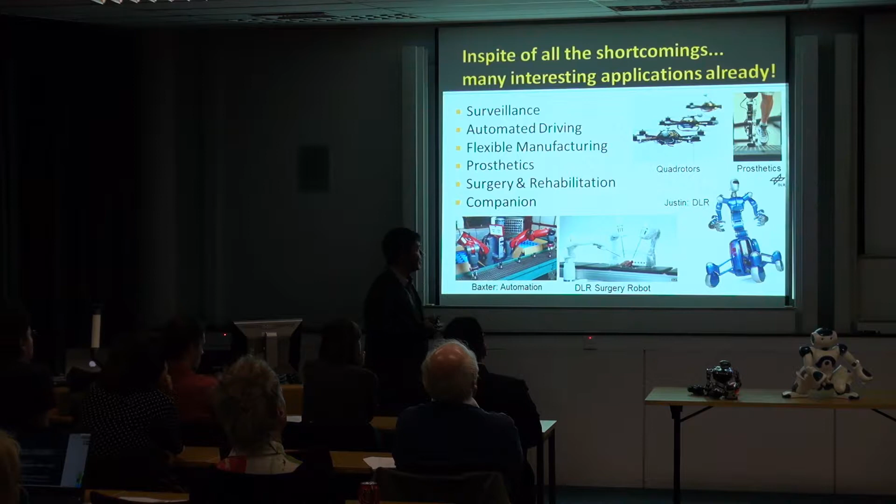Robots like Paro from Japan, which is about being empathetic with its users - I think it's up to people to judge how empathetic things are. But these are domains where robots are already making a difference.

So what I want to get across today is some elements of what it takes to program a robot and make it adaptive, make it intelligent, make it possess some level of what sometimes people call artificial intelligence.

A quick schematic diagram of sensory motor control would look like this. You have some plan, you pass it through a controller, it generates some motor commands, then you have a bunch of sensory apparatus which senses the state of the world, and then you go around in a loop - sort of what we call a PID control loop in control theory.

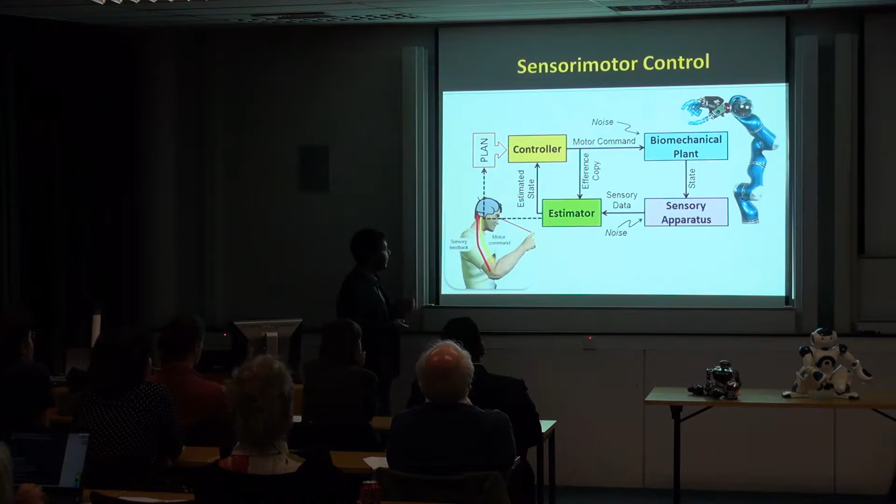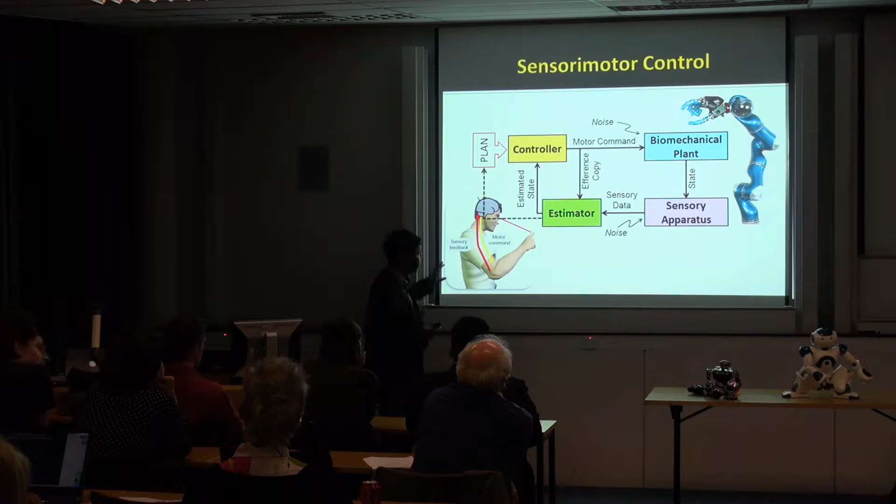Funnily enough, a lot of the things that humans solve at the level of doing everyday tasks, like reaching for a cup or just walking, involves solving some of the problems that robots have to solve doing this.

So what I'm going to look at is these four areas: sensing, planning, moving, and representation. I'll give you little examples of that.

In my abstract, I had written that one of the things that's changing robotics from what it was 10 years ago is the fact that a lot of machine learning approaches, so data-driven machine learning approaches, have actually been applied to the field of robotics, and that has created a huge amount of success. I'll give you examples of that as I go through this.

So there are interesting machine learning challenges in each of these domains - things like incomplete state information, planning under redundancy, incomplete knowledge of the cost function you're approximating. Especially in moving, we've got more and more complex robots, so it's hard to model them analytically, so you need data-driven methods to model them, and obviously representing your problem in the right space.

Everybody here probably knows much more than me about this concept of working in the right space. So let me start by looking at this problem of getting robots to move and how machine learning or data-driven techniques are able to deal with this.

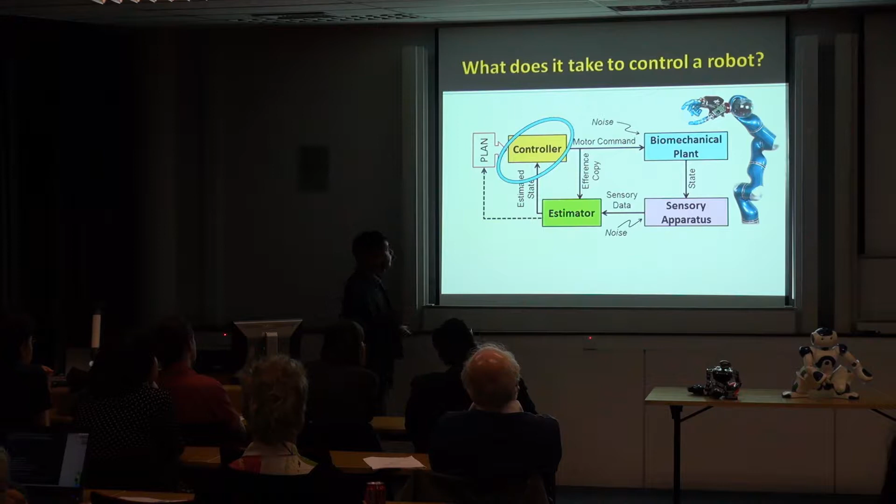Essentially what I'm looking at is what's inside this yellow box. Traditionally, if you control a robot in an industrial setting, or if you're doing feedback control, this is what a traditional feedback controller would look like.

You have some desired trajectory, you look at where it is going and you do some sensory feedback, and if you're trying to do that using some low gain PD control, you will get a behavior like this, where by the time the robot gets to where it's supposed to be, the actual target's moved away.

Of course, you can crank up the gains very, very high. That makes the robot heavily dangerous, because if you're trying to be in its path, it will really rip your arm off. So that's a trade-off - you either work with soft compliant robots and low gains, in which case there's a problem like this, or you have relatively high gains. But humans are very good at dealing with both accuracy and compliance.

So how do we do that? One hint is that we do not just use feedback as a mechanism, but we actually predict ahead the consequences of your action.

If you can predict ahead the consequences of your action, then you can plan very well, and you can basically reduce the need for providing high gain feedback. So that's what I mean by a little feed-forward controller that helps you do this.

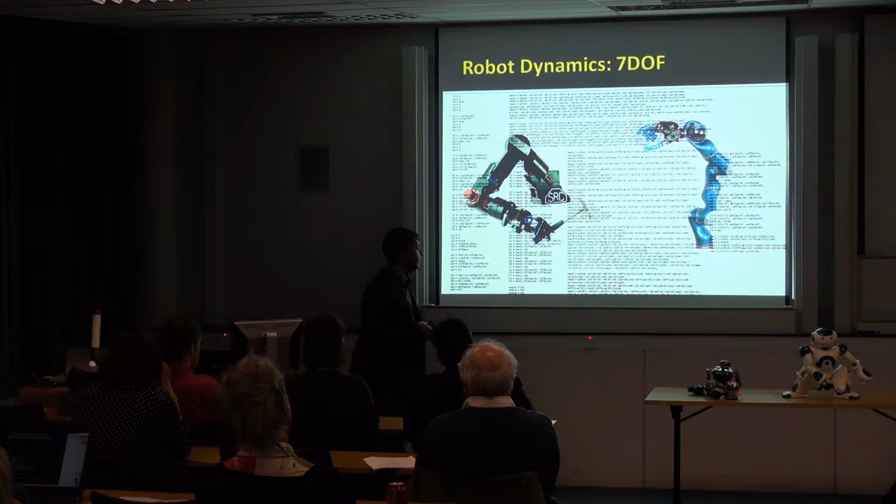So what's an alternative way of doing it? An alternative way is learning from what we call motor babbling. In other words, you get the robot to explore parts of the space that you're interested in, collect the data, and then use techniques from machine learning, data-driven model building, to actually drive this.

So we can either do some sort of random motion or kinesthetic demonstration of some dynamic targets and make this happen in real time.

That was a significant part of my research early on when I was doing my PhD, focused on how we can get real-time learning on high-dimensional robots to work. That was very unique sort of 5-10 years ago, and now people use those kinds of algorithms that we've worked on a regular basis.

So it's become commonplace to apply machine learning techniques to robot control. Let me give you a little quick snapshot of how it works.

So the basic idea is to do some nonlinear regression. Nonlinear regression means I'm learning a function which maps between my current state and the desired states to torques at every joint. That's the bottom line. And you do this in a data-driven fashion. I won't go into the details, but effectively you fit some local linear function to some nonlinear function, and you do this in an incremental online fashion.

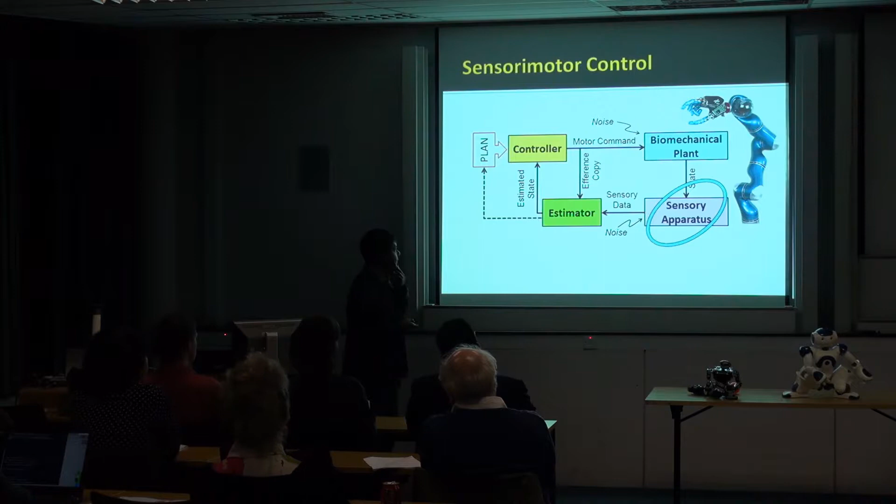Next, I want to show you some fun videos of work we've been doing, and other groups have been doing, trying to sense. Making sense of the world is very important, and trying to sense the world under significant noise, multimodality, and unknown causal structure is really hard. So sensing and imitation is something I want to show examples of research we've been doing in this domain, looking at this part of the control diagram.

This is work from collaborators at DLR in Germany, the German aerospace guys, and this is Justin, a robot. Catching a thrown ball with the hand is not easy. A tight interplay of fast perception, a good catching strategy, body control and dexterity is needed.

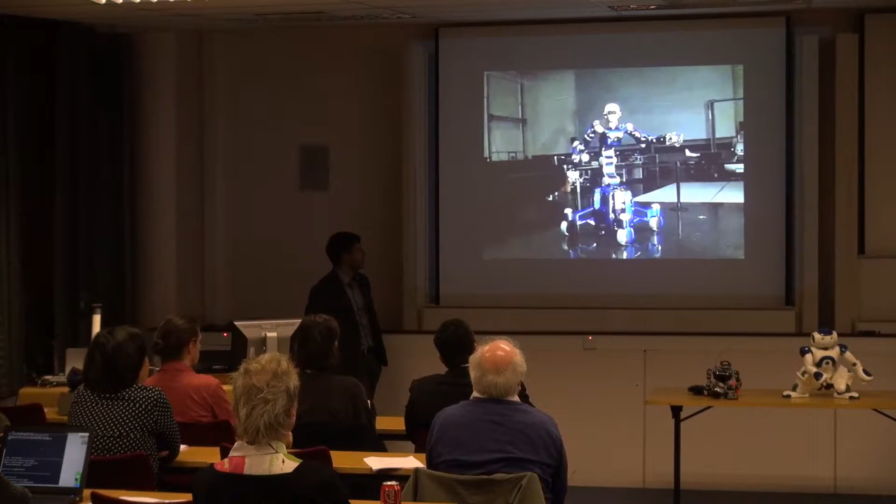Stereo cameras track the balls, and an IMU measures the 6D head pose to account for vibrations that can't be completely canceled, introduced to the robot's lightweight structure due to rapid catch motions. Based on continuously improving trajectory predictions, a real-time path planner running on an external cluster repeatedly decides where, when, and in which configuration to kinematically optimally catch the ball. The resulting joint paths are executed by the arms, torso, and mobile platform. The head joints are controlled to keep the ball in the camera's field of view.

The hand closes at the planned catch time. For easy user interaction, an iPad-based interface is provided. The system robustly reaches the necessary precision of 2 centimeters in space and 5 milliseconds in time, leading to a catch rate of over 80%. Despite the challenges of vibrations, elasticities, and distributed sensor, actuator, and computing resources, this is achieved by combining the right sensors, intelligently taking the different precisions of the kinematic subchains into account, and thoroughly handling all timings in the sub-millisecond range in the software.

So that's an example of using really fast sensing, prediction, and to some extent learning of the forward kinematics to actually catch things. But you've seen here that most of the objects you're trying to catch were completely visible. So obviously the next challenge is what happens—humans are very good at reaching things that are partially occluded.

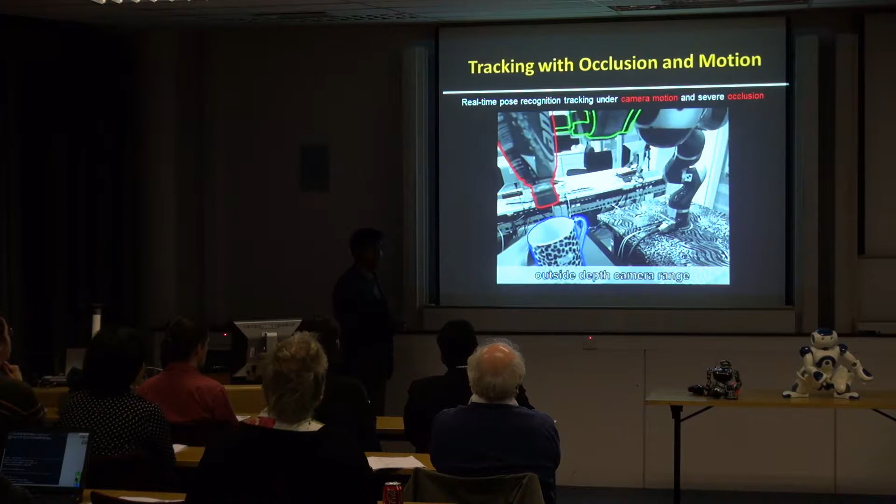Even though the bottle is occluded, it still tracks the actual position. Even when it's really close to the camera, where it loses most of the object, it can still track the object position, and you can see that. You can see this if you come to our lab on the first floor in Edinburgh informatics—you can actually see this in action.

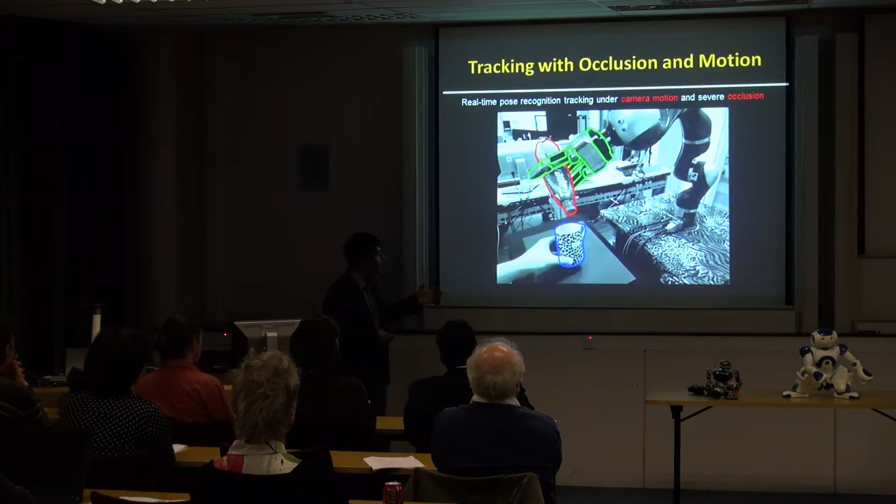This is a big improvement in real-time tracking of occluded objects using data-driven techniques. You'll notice here the camera is still; in the next bit, you'll see the camera itself start moving. That's the other challenge—if you've got a robot, the body of the robot itself is typically moving around. So tracking under occlusion and under significant motion of the camera itself is a big challenge, and that's what we've been trying to look at.

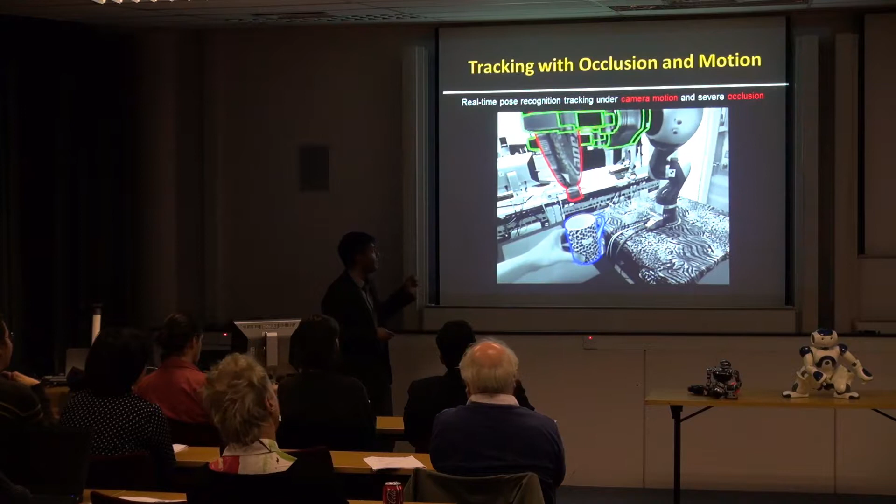Again, data-driven techniques are behind making this happen. You can think about various scenarios where you've got fast motion of the camera and you're trying to localize things. So that was about getting the sensing right—one scenario with fully observable objects, another with significant occlusion. Now, once you've got the sensing sorted, one thing you could do is get robots like these to move by sensing a person move and mimicking that motion, putting it onto the robot.

There are various challenges in doing this. Obviously the kinematics is a big challenge. A humanoid, however much you try to make a robot like a human, the degrees of freedom and the joints, the kinematics are very different, and dynamics is another big problem on top of that. So we've done significant work on making this real-time transfer happen.

What I'm going to show you first is a quick demo, let me see if I can get the light back on. Okay, so I'm going to show you two things. One is the demo of this robot here, and this one as well.

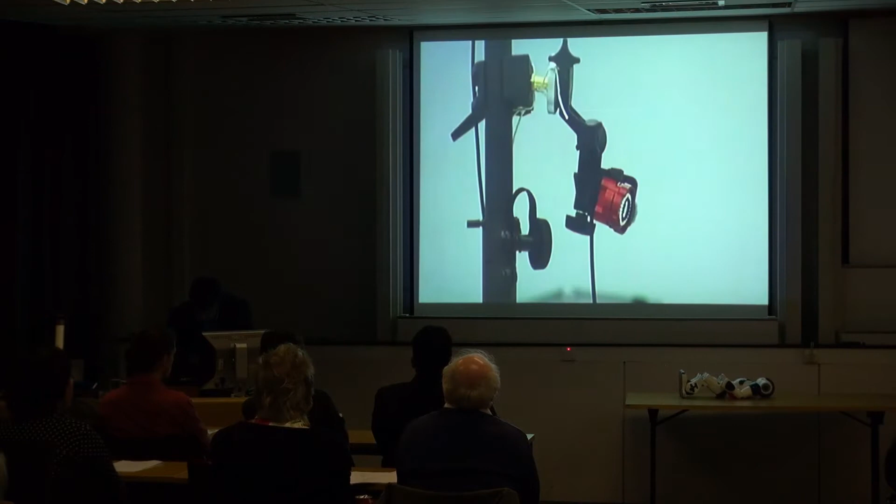Here's an example of the robot directly cutting the middleman, if you may, sort of mimicking the motion. As you can see, because of the morphological differences, one step gets translated to multiple steps for them to actually move.

Again, this is real-time motion capture, transference and correspondence with kinematic filters and dynamic filters, and then onto the robot in real time. So these are examples of how we can transfer motion across the robot.

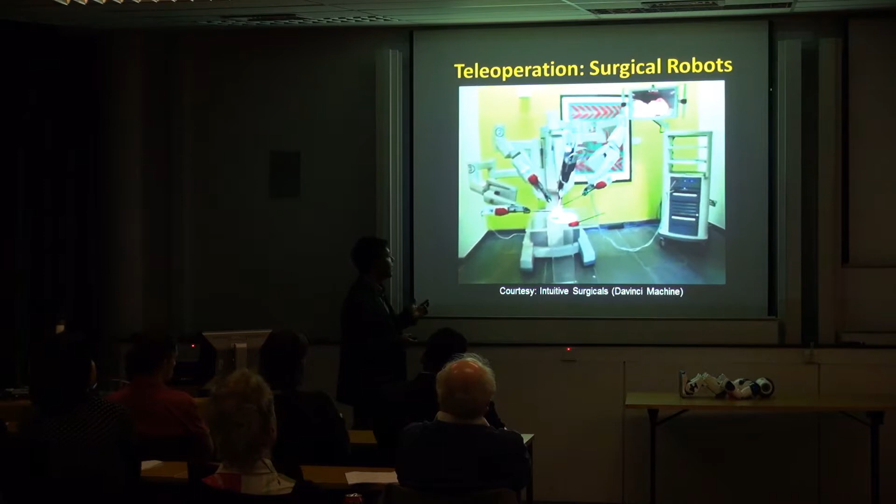This notion of using sensing and teleoperation, in this case a person teleoperating the whole body motion of the robot, is applied in many fields, including the Da Vinci machine from Intuitive Surgical. This is a demonstration of this minimally invasive surgery machine, in this case peeling a grape.

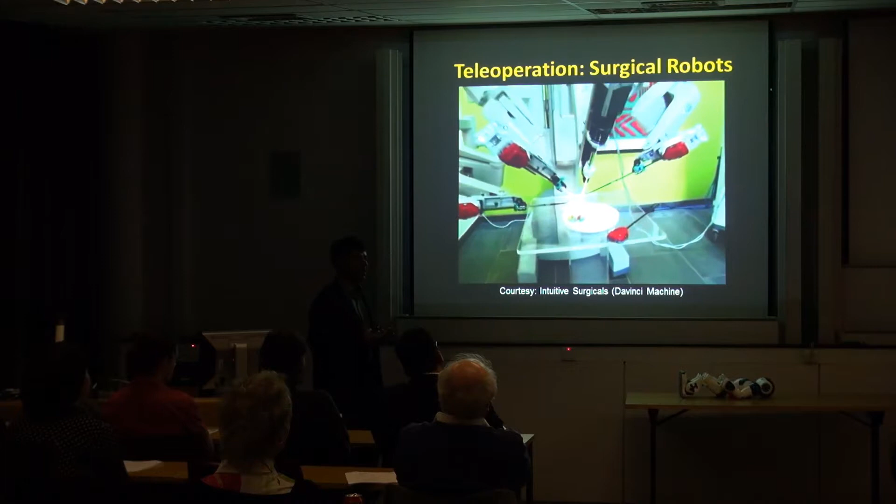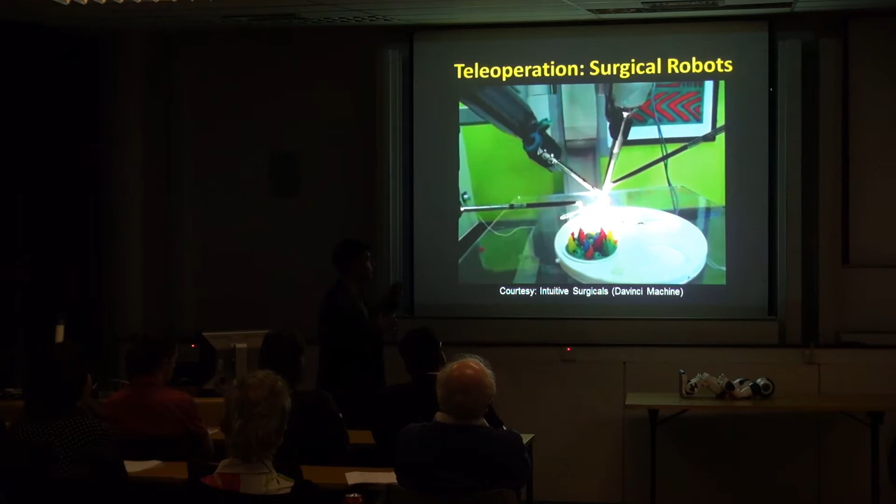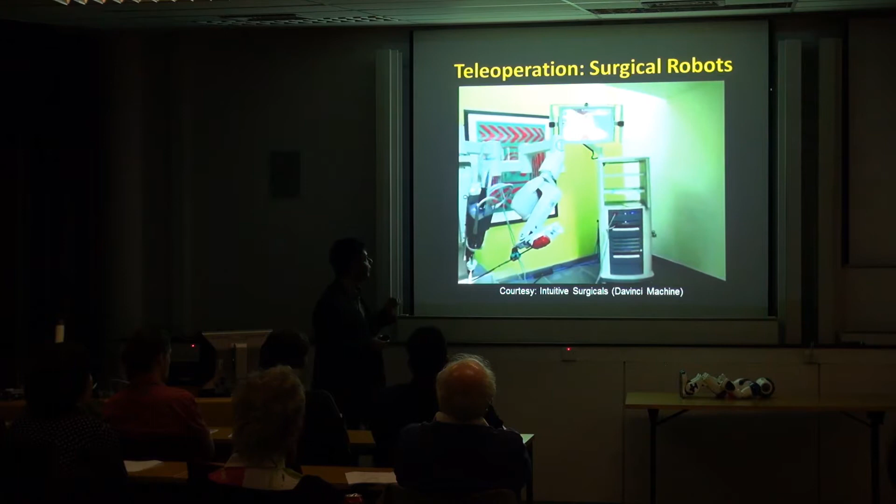So it's not really invasive, don't worry if you're queasy. Here the main idea is you have a person teleoperating it, but the person itself may suffer from tremor and inaccuracies, so the robot takes out those elements, and under feedback you have fine precision monitoring of things.

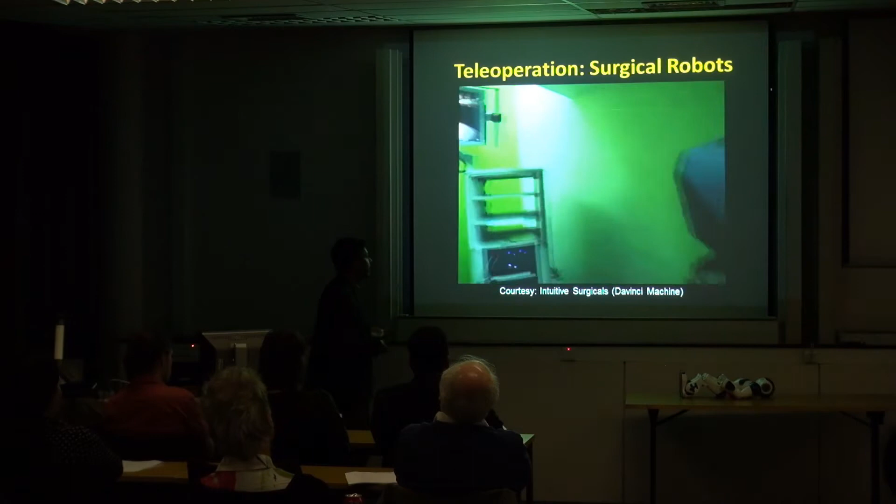Again, this is marrying the best of both worlds - the contextual decision-making capabilities of humans and the precision, accuracy and repeatability of robotic platforms in an interesting way. Here you can see the person actually teleoperating the device with a little phantom. Again, you need a bit of practice for doing that.

So that was on the sensing and imitation side of things. I want to look at planning elements next.

Planning has been done in various ways in robotics. I'm not going to talk about traditional planning, where for a full-bodied humanoid or mobile robot, planning typically means trying to build a path around the environment, or for a humanoid to grab things, wrap things around, that kind of stuff. I'm going to talk about planning in a slightly different scenario.

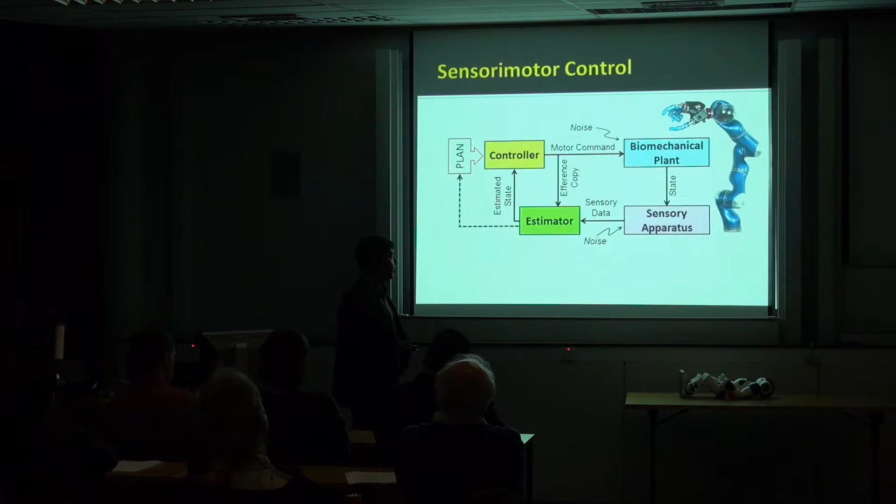I'm going to talk about planning in the scenario of working with variable stiffness, variable damping. Let me skip this, and I'll just show you straight away what I mean by that.

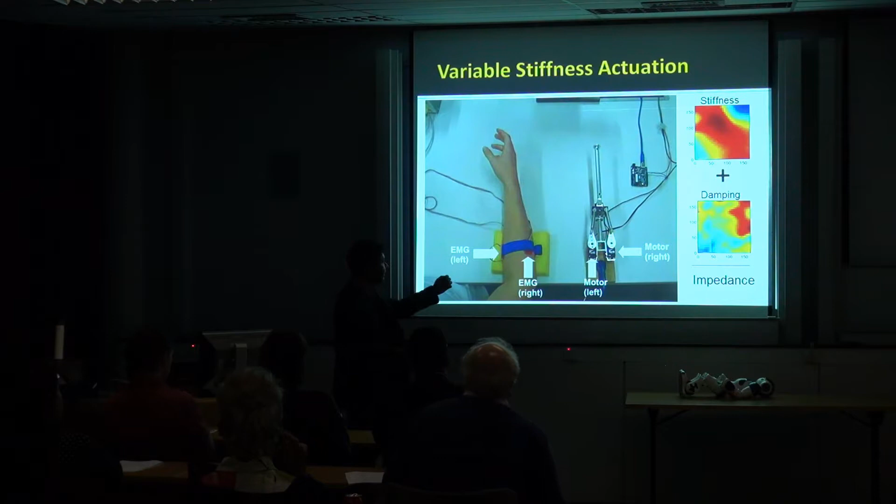Here's a toy example of a little 1 degree of freedom joint that we built at our lab. It's got 2 springs, and it can move the arm by moving either of the 2 springs. It's a redundant joint, so it can move 1 spring - if you move 1 spring to the right, it'll push you to the right, and the other one pushes you to the left, but you could also simultaneously move it.

And this is connected through an EMG sensor, a sensor which senses the activity of your muscles through some circuitry to correspond to. So if I actuate this muscle, this spring moves.

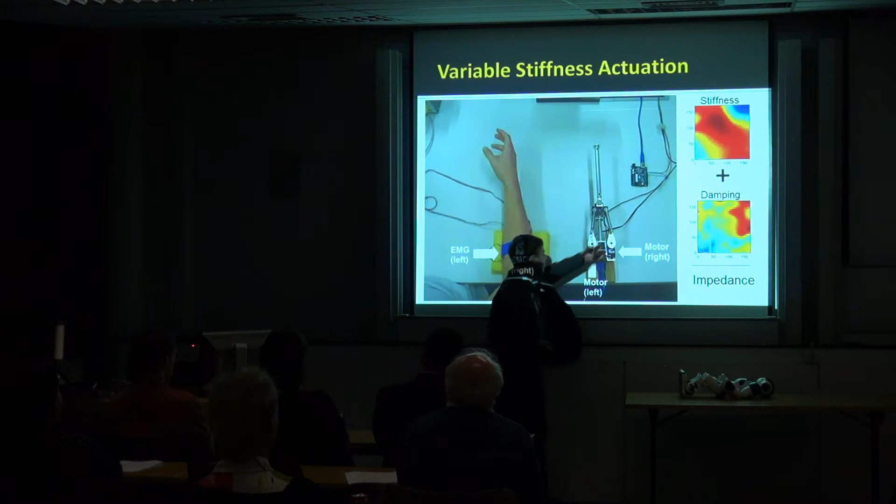If I actuate this muscle, this spring moves. You'll see that I can make the single joint move left or right by doing this. But I can also have an alternate strategy. I could move this while co-contracting, while being very stiff with my arm. So this is an example of a co-contraction. I could make the same movement while co-contracting.

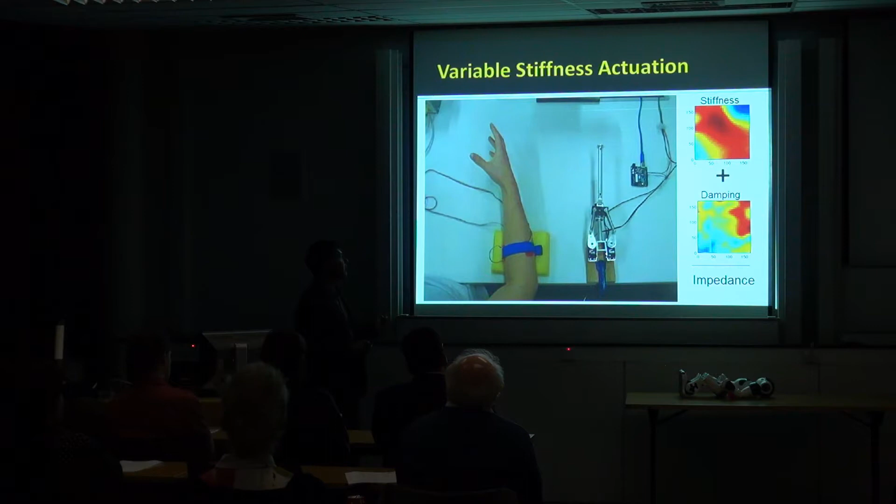The difference between making a movement while co-contracting and not is if I have some disturbance, then when I'm co-contracted, the disturbance rejection happens automatically, without any additional control, at the expense of additional energy. Obviously when you co-contract you're spending more energy, but you're changing the dynamics of the system to reject disturbance. The idea is, can we optimize this trade-off between expending more energy and optimizing the stiffness characteristics of a plant to optimize the thing you want or care about?

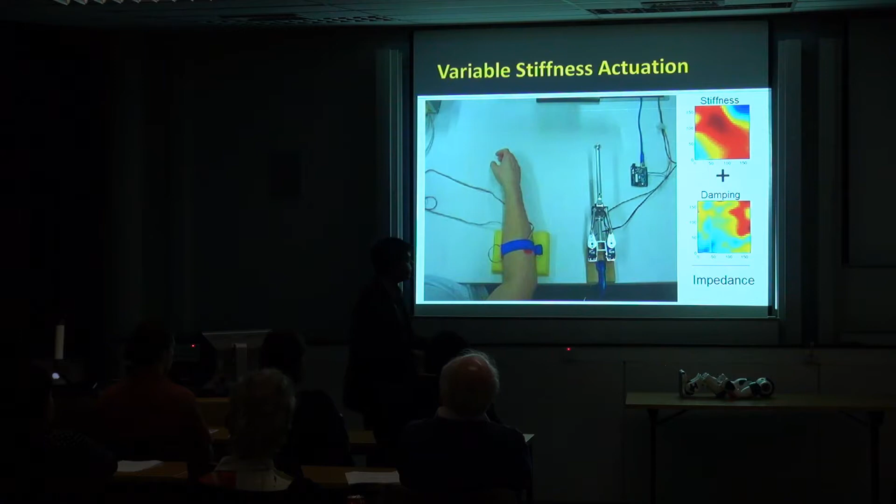So that's what we did under the planning scenario. And why we care about such kind of planning is because, for example, we work with a collaborator in Japan on these kind of exoskeletons - the Cyberdyne at the University of Tsukuba. When you talk about exoskeletons, you do care about compliance.

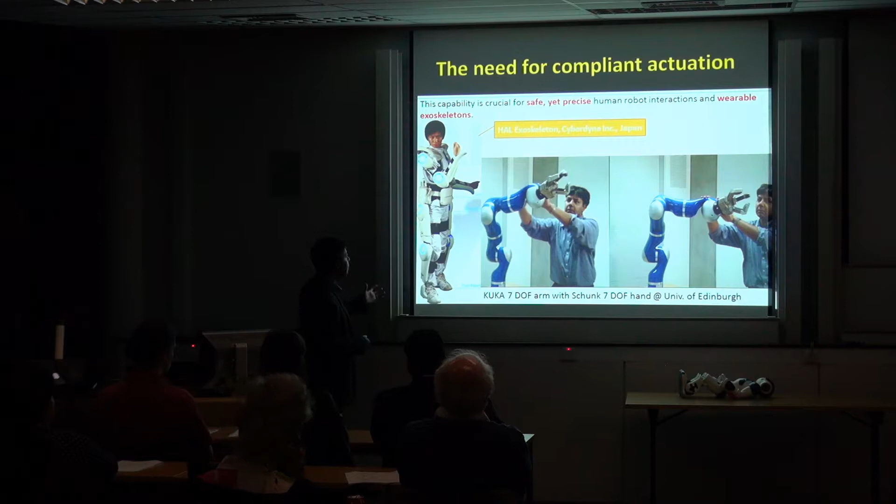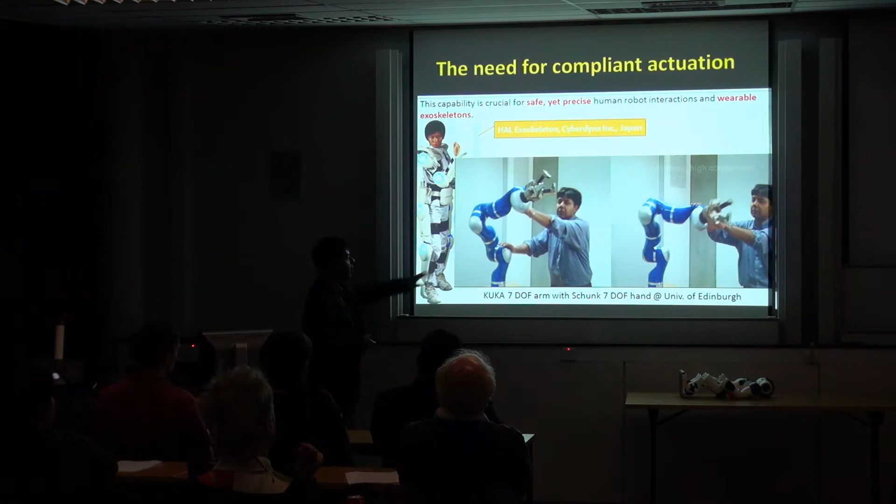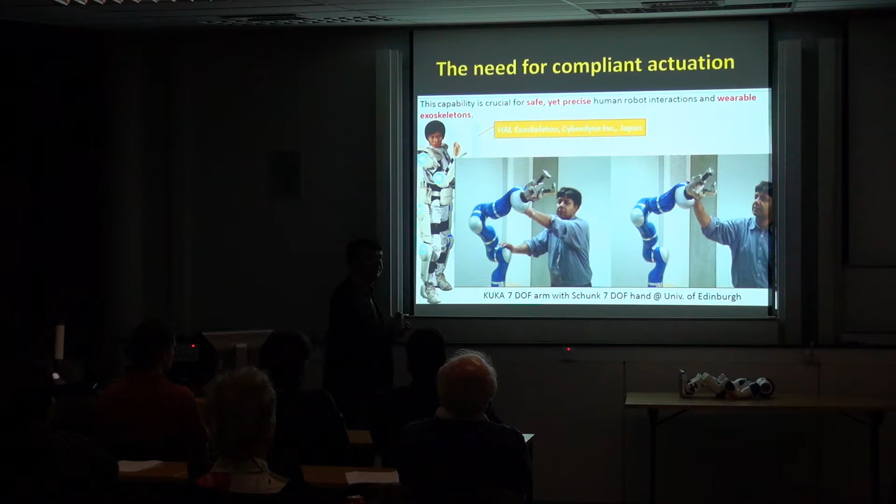So for example, this is the traditional very stiff scenario - if I push against it, it'll push back. On the other hand, this is an example of a robot which has got low stiffness, high compliance. In other words, it's trying to make a desired movement, trying to follow the figure 8, but at the same time it gives in when you push against it. This kind of compliance and safety is paramount for exoskeletons, because you don't want the robot actually driving you. You need to have some biosignals which help you do stuff, but at the same time be compliant.

So in the interest of time, I'll skip through some details, but I'll show you some work we've done with compliant robots. We've worked with the DLR, the German aerospace guys, to build a robot like that, and you'll see some compliant robots if you come down to our lab on the first floor of the informatics building. We basically used an optimization framework, again machine learning techniques, to optimize for this movement. I'm not sure if you're interested in this kind of stuff, but let me go through this.

Essentially what you do is optimal feedback control, which means that if I'm given some characterization of the system based on some equations of motion, and if I have some cost function I'm trying to optimize - and this cost function may be a combination of some final cost like accuracy and some running cost like energy - then I use an optimization technique to optimize this, to minimize this cost or minimize this energy given the dynamics of the system. So we do this now in the space of variable impedance, not just in terms of planning, but in terms of the impedance characteristics.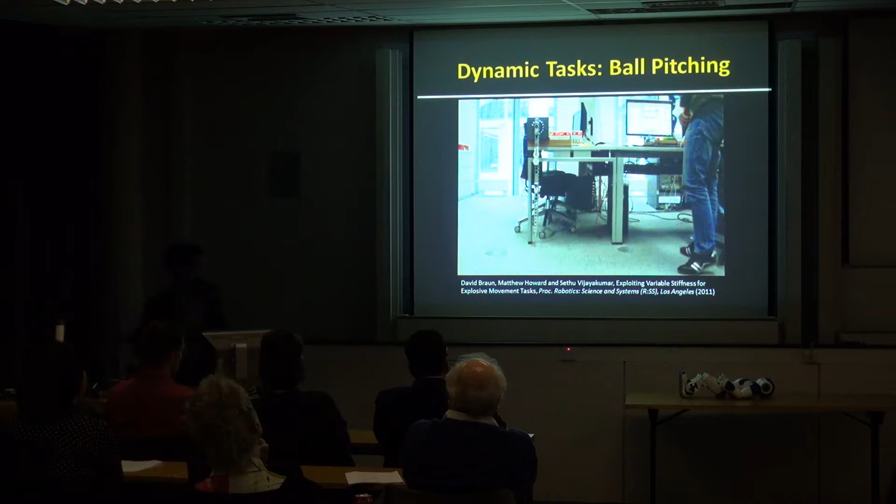That element of taking the dynamics and the uncertainty into account is very relevant for this kind of work. And what we've done is we've taken this approach, and let me show you a nice little video of a variable impedance robot that we've actually built in the lab. This is a 2 degree of freedom robot, and every joint has the ability to vary its stiffness.

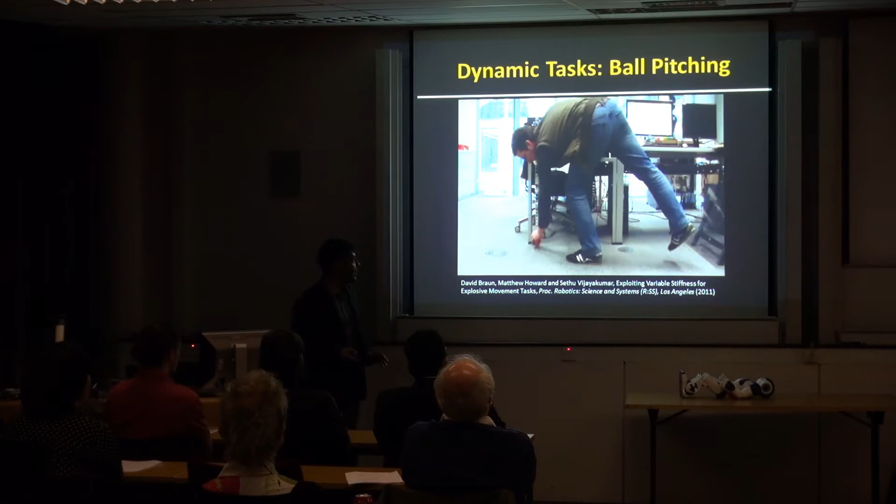It's basically a kind of baseball throwing robot, but it's effectively able to pump energy into the system and induce more energy than what an individual motor can. The idea is that by adjusting the stiffness, just like we do in a baseball throw, we're able to maximize the release velocity and throw very fast. So this is an example of optimizing planning under the stiffness modulation characteristics.

It sort of releases when it swings backwards. It adjusts its compliance in its joints to achieve, in this case, a higher throwing distance, for example.

So it's funny where this has taken us. We've applied this to everything - in this case, we applied it to some variable impedance actuation to generate higher green energy. This is a Pelamis snake, and we're now building a 1 in 50 scale model of adjusting the impedance during the motion of the snake to extract more energy.

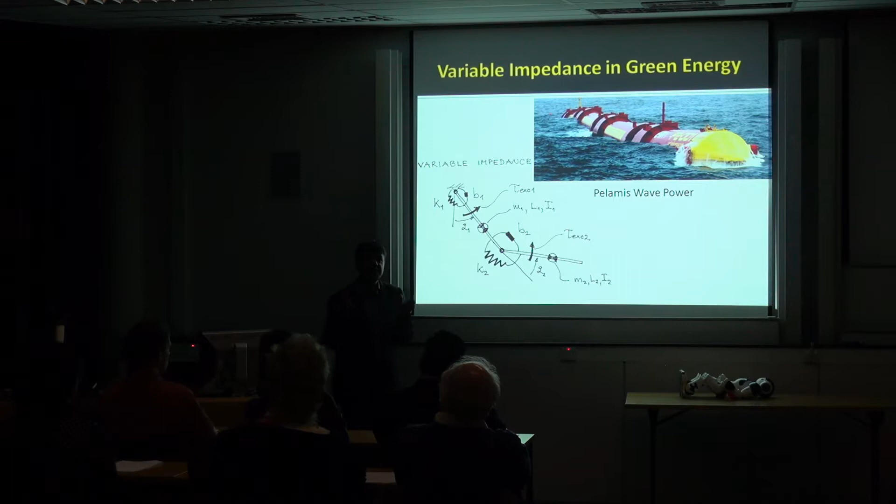So this is completely opposite of stability - we want to induce instability into the system to maximize output. Right? So this is something that we've been working on.

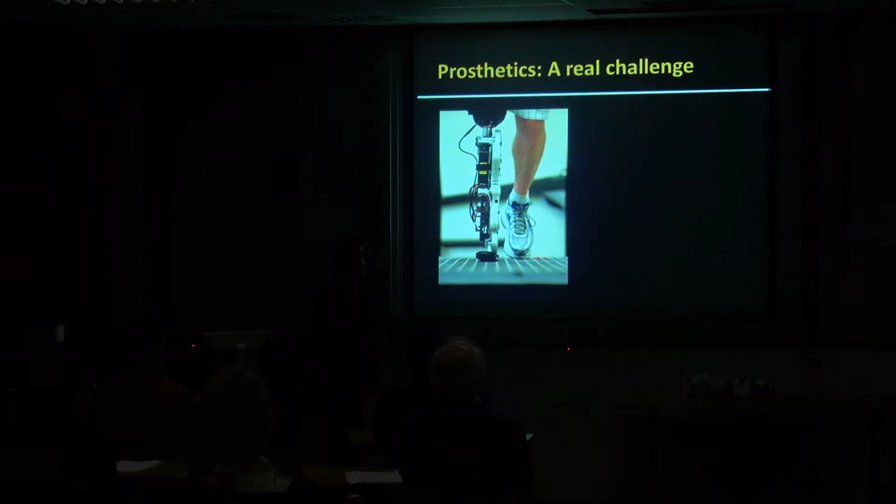I have a video of this working in hardware as well, but it doesn't play properly, so I'm going to skip that. So where are we going with these kinds of things? This variable impedance stuff - one of the first application domains we're looking at, besides wave energy and robotics, is in the area of prosthetics.

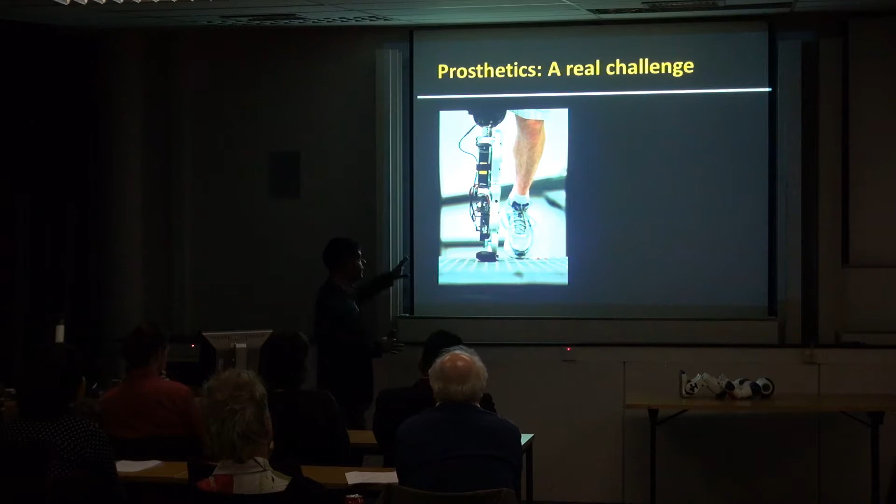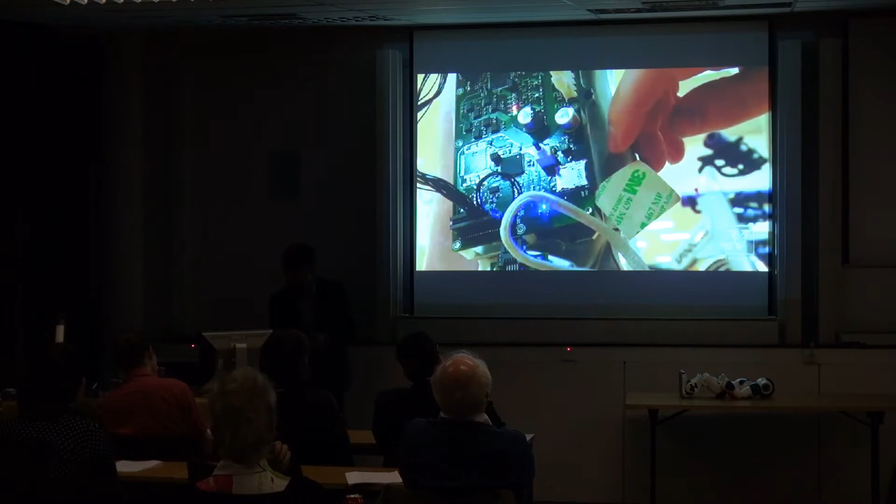So here's an example of prosthetic work. This is not from our lab - this is from the University of Vanderbilt. This is an example of a prosthetic leg, an active prosthetic leg, which can change its behavior. This is now adjusting the phase based on the phase on the good leg.

Initially, it takes a while for the person to get used to it during the walking gait, but eventually they get the hang of it and start walking much more naturally.

But what's missing here is that the stiffness at which the prosthetic leg is connected to a person's limb is pretty fixed. So whether he's walking on solid ground or on mushy ground, on grass, we would have the same impedance. What we're trying to do is take this approach of modulating the impedance and build new kinds of systems which are able to adapt and change these things.

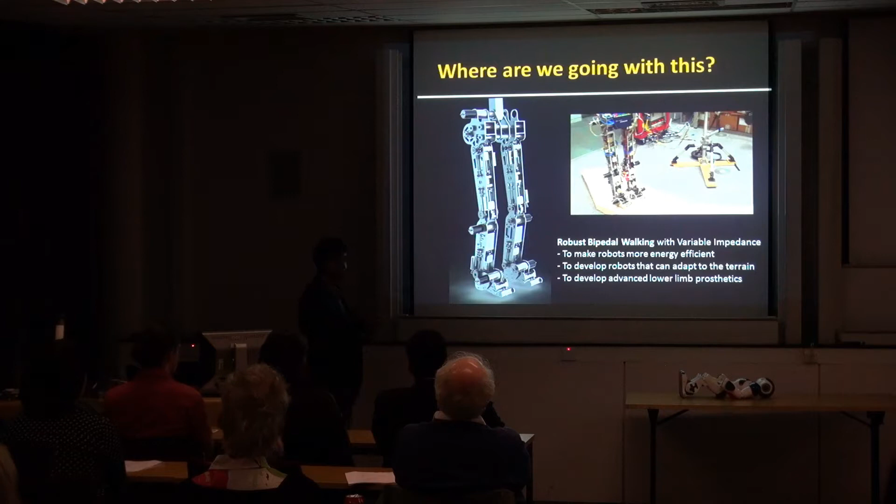Again, if you come to the lab, you'll see a little device built completely in-house. It's certainly not ready for the market - it's got tons of wires sticking around and all this mess. But it's got the claim to fame that it's the first robot in this world which is able to change both the impedance, both the stiffness and the damping, at every joint independently.

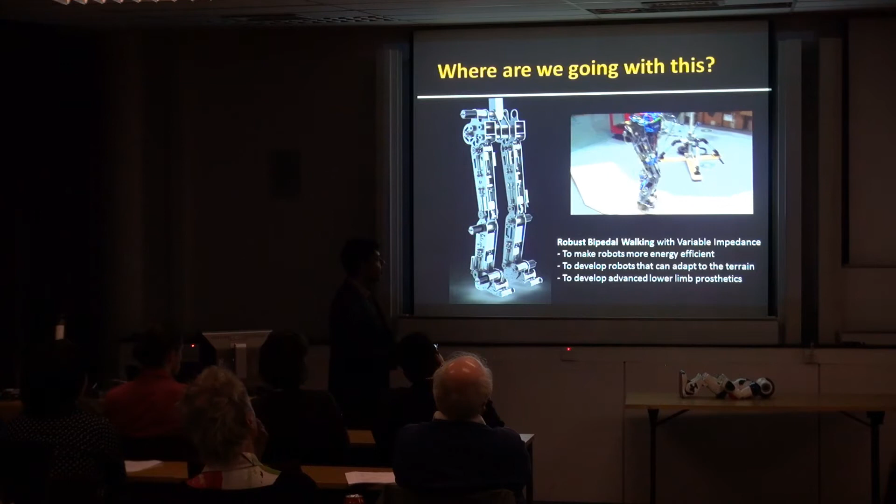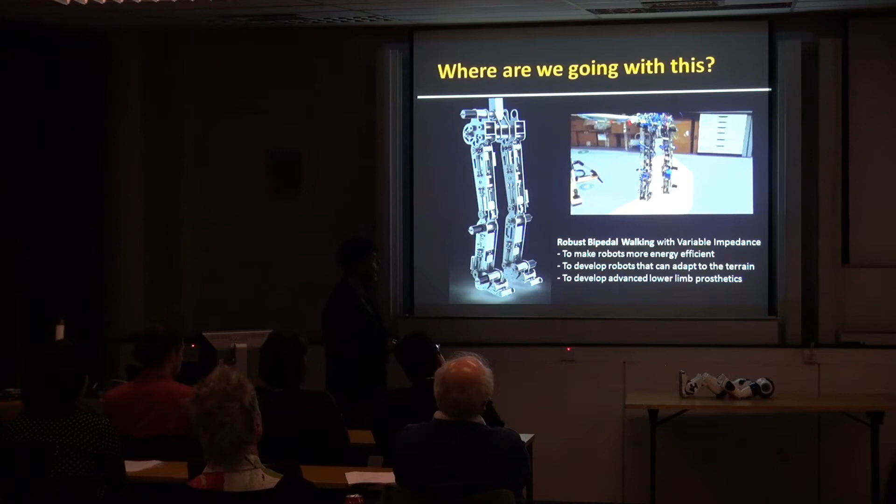And we've got some first results on making this kind of bipedal walker walk on different terrain, and able to adjust its stiffness based on whether we are stepping on hard ground or on something soft. Again, the idea is to push this towards the prosthetic domain when this is ready.

Okay, so the last bit is working in the right space. Again, all of these things, when we talked about planning, control, and representation - there's a saying in machine learning that you can have a really smart algorithm, but if you apply it on a space that is completely wrong, then that's no good. On the other hand, if you work in the right representation, the right space, and define your problem very well, then pretty dumb algorithms can work pretty well. That is indeed our experience.

Some of the stuff that we work on - I won't go into the details - we focus on representing the movement or the task that we care about in the right space, so that when we plan with algorithms, they are able to exploit the fact that we have defined the problem very well. I'll give you an example.

Here's an example of trying to get a robot to reach inside a box, and all it's supposed to do is just stay inside the box. Typically in robotics, people specify the forward kinematics of the robot and a point in the center of the box, and say reach for that - if things move, you adapt the end effector accordingly. But when you say go inside the box, it doesn't mean be right in the center. You can be a bit to the left or right, as long as it's inside the box. So that's what we do.

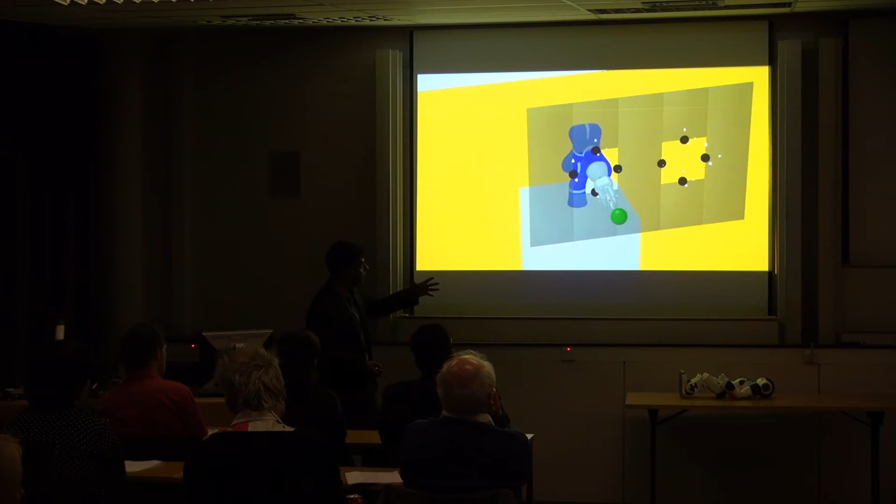We try using what we call interaction mesh as a way of representing the movement. In this case, it uses this relational concept of looking at how the robot's end effector relates to the entire box. So when the space moves, the concept of what is in and out moves with it - it's not metric anymore, it's a relational concept. That's why the robot doesn't move until it knows it's going to hit the edge, and then once it's near the edge, it starts moving. This is the concept of working in the space of interaction mesh, so you can adapt the motion to novel situations.

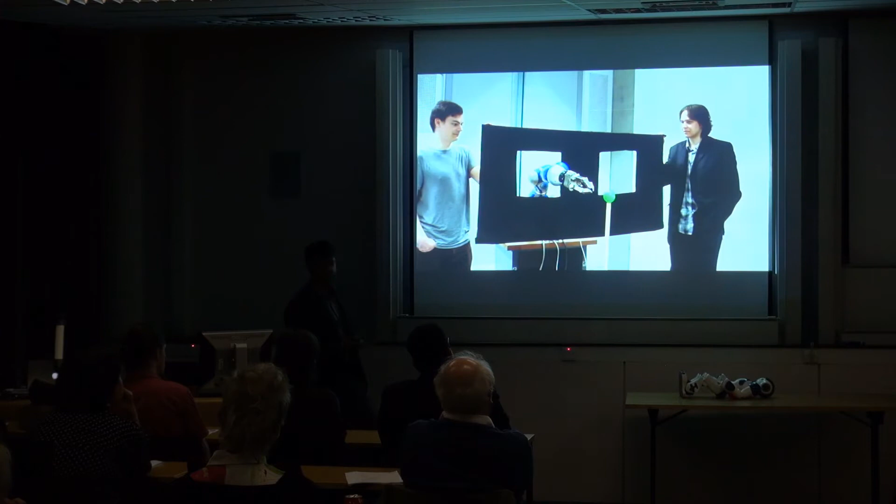In this case, think of reaching through a hole - this concept of keeping a particular remapping versus replanning. If things move, the motion gets adapted automatically because of this relational concept rather than an absolute concept. So that's the nice thing. And we've applied this concept to very many things, like in this case...

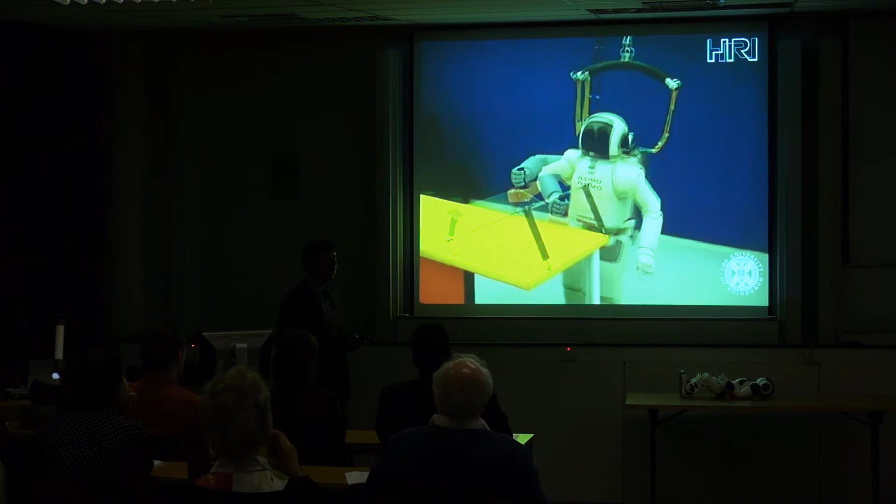We're thinking about how to get a robot to wipe a surface, in collaboration with the Honda Research Institute - you've probably heard of the Asimo robot. This is about giving many examples of a wiping motion and getting the robot to generalize this concept of what it means to wipe, rather than having a metric notion of going from point A to point B. This notion of coverage can then be expressed as a task, and the advantage is that irrespective of the slope - whether it's stuff seen before, an unseen surface, or a curved surface - this notion of wiping gets transferred. In this case, this slope hasn't been seen before, so the motion is adapted to ensure the concept of wiping gets implemented, not mimicking the movements.

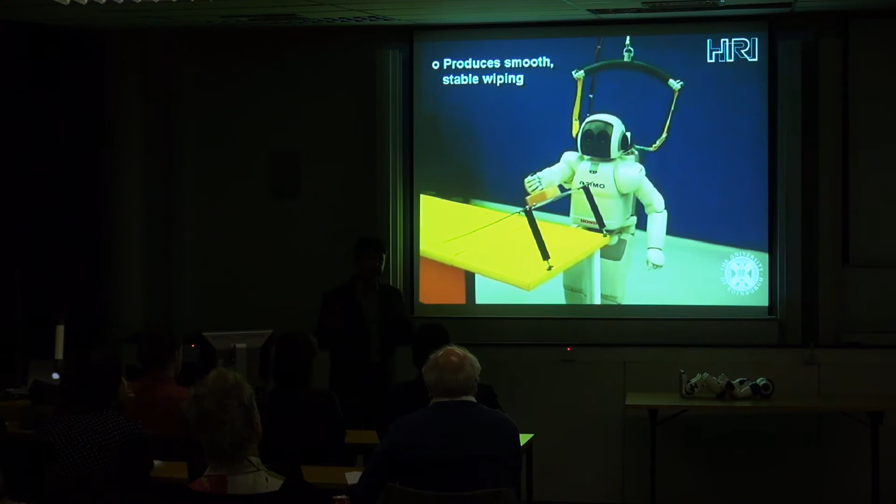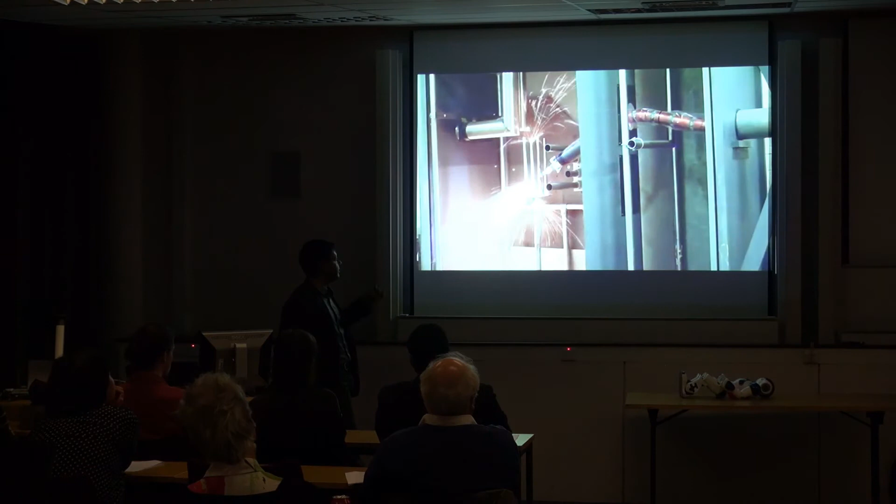Finally, one of the things we've applied this to is snake robots. This is in collaboration with a company called OC Robotics, and the planning in these kinds of robots requires that we work in topology space, because the traditional way of planning with metrics doesn't really work. Here's an example of a snake robot with an actuator pack going into confined areas - examples of robots that work in nuclear energy plants, confined spaces, doing operations in really narrow areas.

For this, the planning requires that we move away from traditional methods and work with concepts like interaction mesh - things that define motion in terms of relational properties rather than absolute metrics.

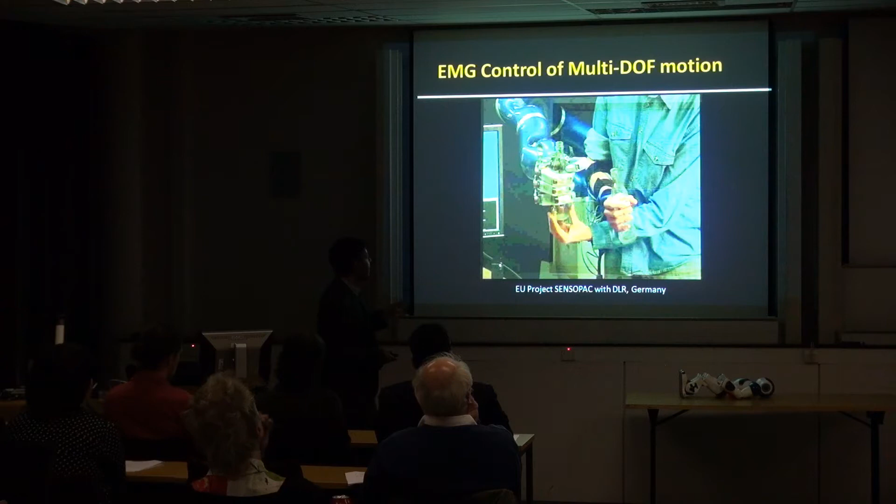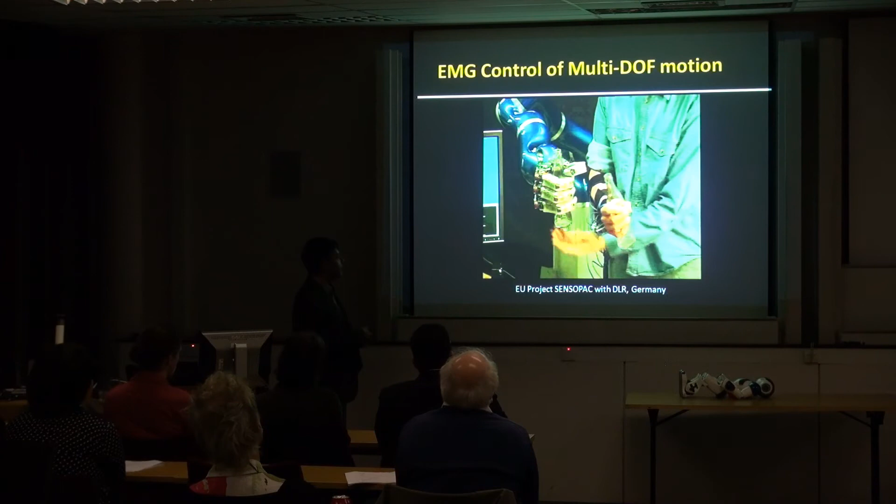I want to finish off by showing you some of the things we've been working on in the context of EMG sensors and prosthetics. One of the things we've done, again in collaboration with DLR, is getting sensors on a person's biosignals to control a robot arm.

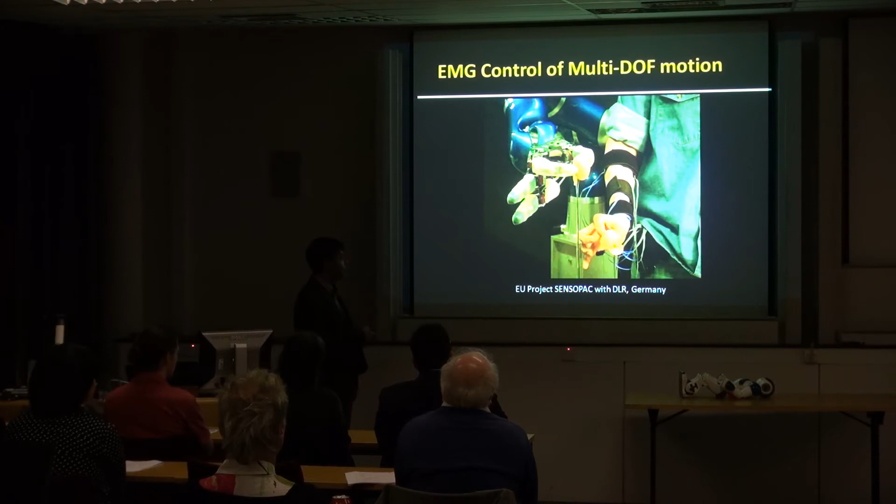In this case, you can see a very expensive way of creating an omelette is to get a robot to mimic the human hand from EMG signals, decoding the biosignals to control the fingers of the robot. I'll show you a quick demo, and while I set up, I'll show you this video of work we've been doing with prostheses with a company called Touch Bionics based in Livingston.

A major goal in prosthetics is to create artificial limbs that both act and feel like real limbs. Researchers here at the University of Edinburgh, alongside the Scotland-based company Touch Bionics, developers of the award-winning i-limb, the world's first commercially available bionic hand. By amplifying signals from muscles under an amputee's skin, the hand can be instructed to open and close in a variety of different types of grip.

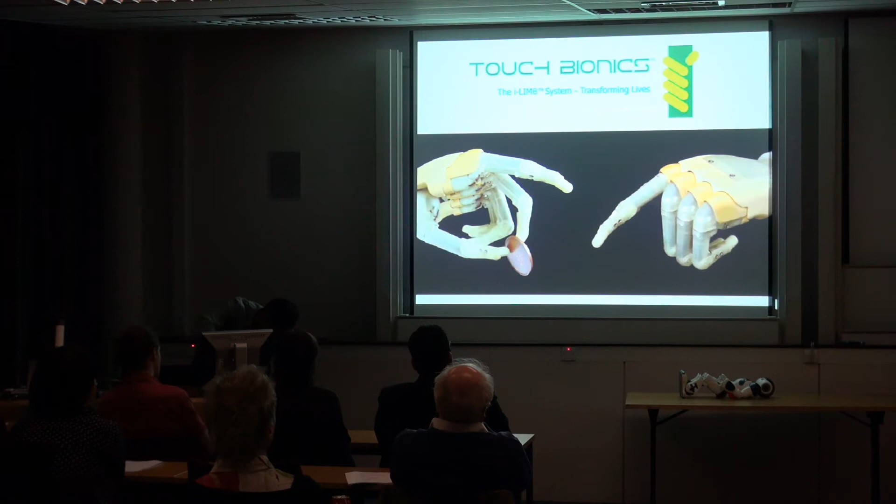A major goal in prosthetics is to create artificial limbs that both act and feel like real limbs. Researchers here at the University of Edinburgh are working alongside the Scotland-based company Touch Bionics, developers of the award-winning i-limb, the world's first commercially available bionic hand. By amplifying signals from muscles under an amputee's skin, the robotic hand can be instructed to open and close in a variety of different types of grip. The fingers automatically stop when they form a firm and steady grip on the object, allowing the patient much more dexterity than ever before in a prosthetic device.

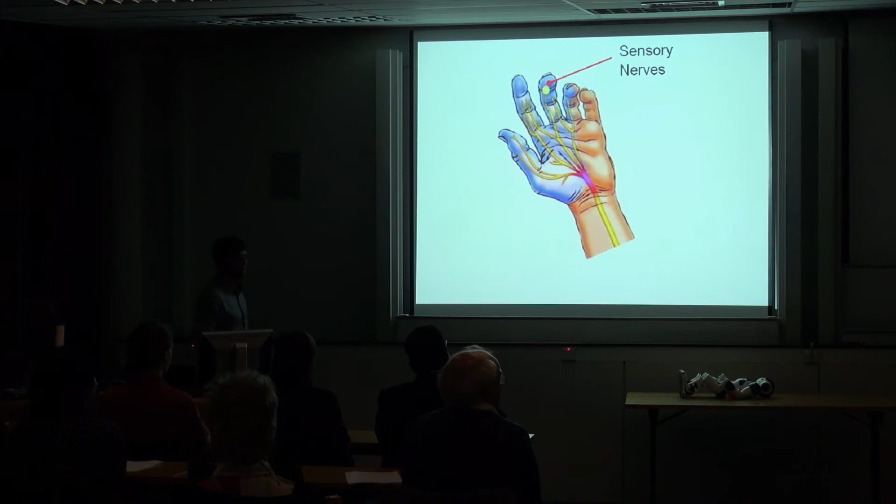One thing we often take for granted is our sense of touch. Yet without it, we would find everyday tasks a significant challenge. There are thousands of nerves in every one of our fingertips. We grip objects sufficiently so they do not slip from our grasp, but not so hard that they might break. However, amputees do not have this luxury, making what would seem a simple task rather difficult.

The key idea behind our research is that for successful use of a robotic hand, patients require not only the ability to control the hand, but also continuous sensory feedback. At the University of Edinburgh, we're examining ways of interfacing this sensory feedback with the nervous system, by passing small electric currents into nerves in the upper arm, or by creating patterns of vibration on the skin, so the amputee can gain a brand new sense of touch.

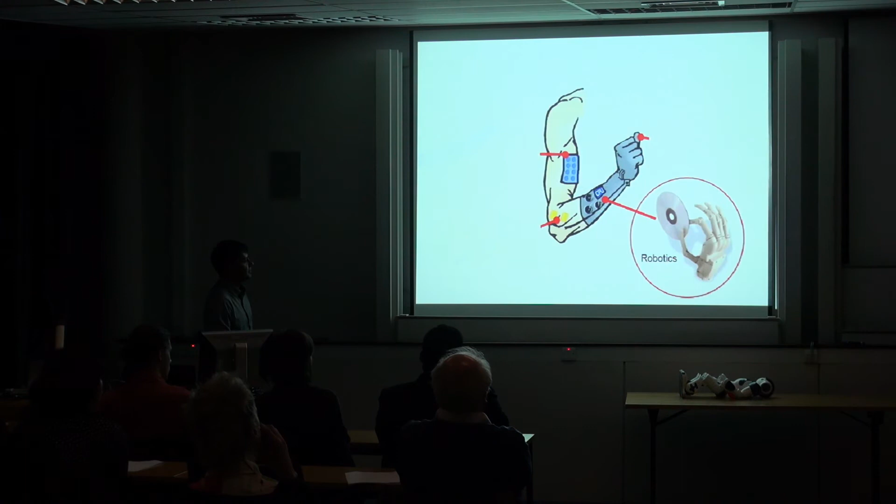We fit patients with the i-limb and add sensors to detect forces on the fingertips. The signals from these sensors are processed and then communicated to the patient by electrical or vibratory stimulation, and this feedback can be used to coordinate and control the robotic hand without relying on constant attention, allowing the patient to get on with their daily lives. We are presently running experiments to understand exactly how the brain is able to learn to use the artificial sense of touch we have created, and how, with practice, we stop thinking about it, and it all becomes quite natural.

So you can actually, I've now worn an EMG sensor, and I'm able to control the hand, and lifting. This is again using the best of human contextual decision making along with the real-time processing capabilities in a robot hand. So would anybody like to try it on?

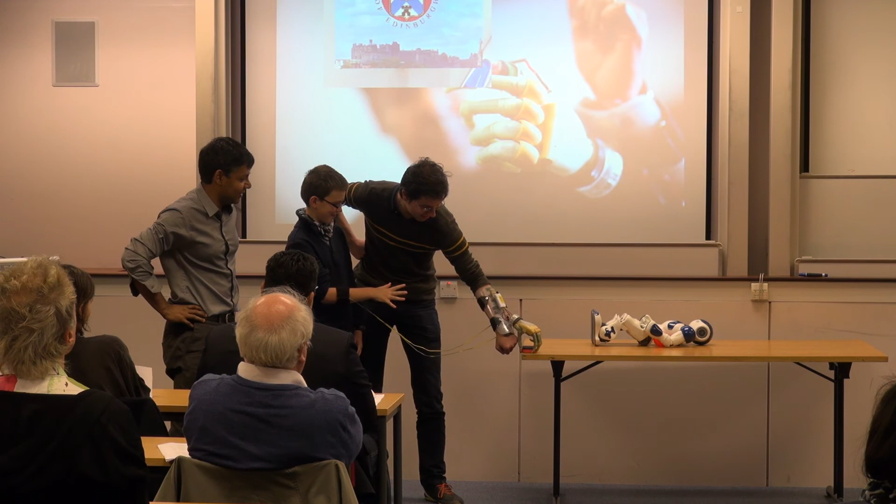Excellent, that's good. So do you want to have a go in terms of wearing it? Okay, I knew that you were expecting that, so let me do this.

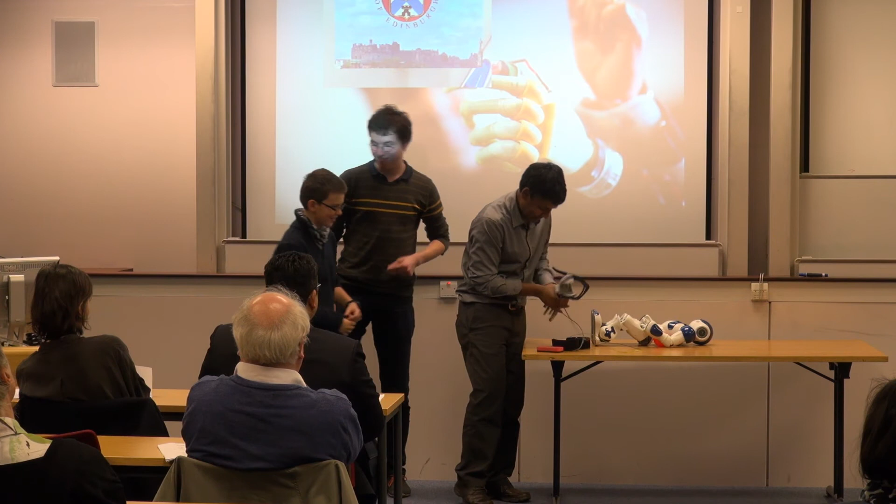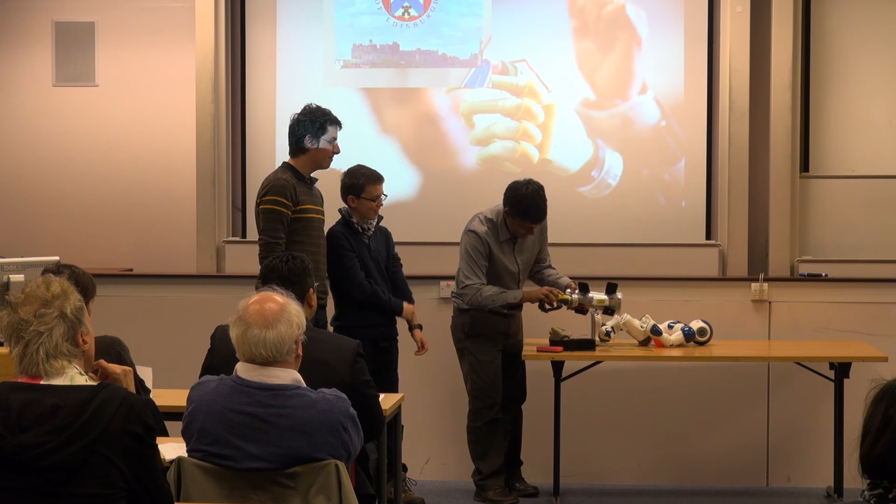So what I can do is give you a slightly cooler version 2 of the hand. I just want to show you that it's easy to take off, and so this is version 2, slightly more funky. But it's version 2, so there's no guarantee it's going to work. It might explode, okay.

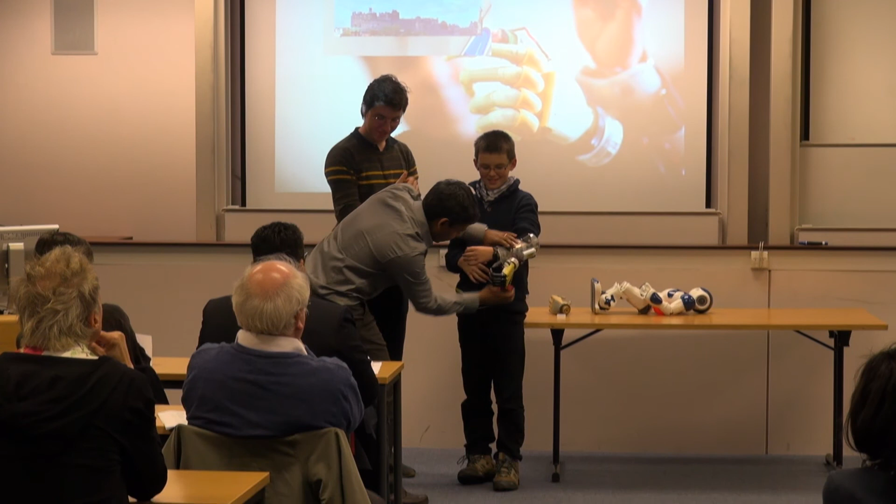This way, yeah, you want to try and... okay, let's give it a shot. Okay, so face this way and we'll turn it on. Okay, we'll try. No, just the wrist, no? Wait, okay, okay, again, just the wrist.

Okay, so I'm really out of time, so I'm just going to quickly summarize and finish.

So we've looked at how robotics and machine learning together can be an exciting science, because we've got lots of fundamental interesting questions that robotics throws up, and it requires expertise from multiple disciplines. We're in an exciting era of growth in robotics, and most importantly we're now seeing many real-world challenges, and I'll show you an example in the next slide of the DARPA robotics challenge that we've been involved in, and it's really starting to make a real change. One of the key drivers for that is because we've applied machine learning techniques and harnessed the advances in these techniques and applied them to the domain of adaptive real-time control.